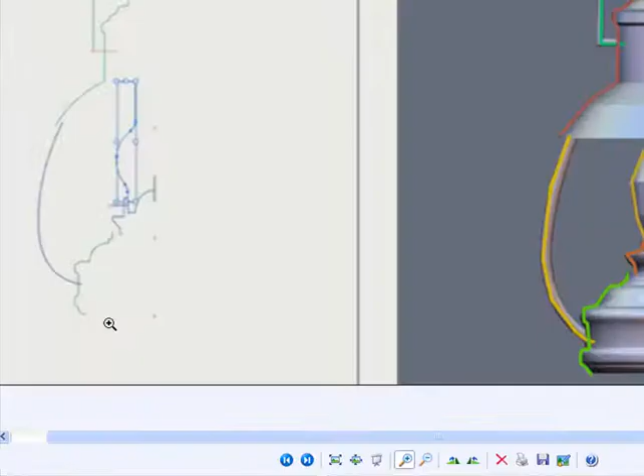The image on the right is the image that was traced and it's color coded. As you can see, I have the green line for the handle and the red line for the bell, and so on. I just traced the left side of the image only.

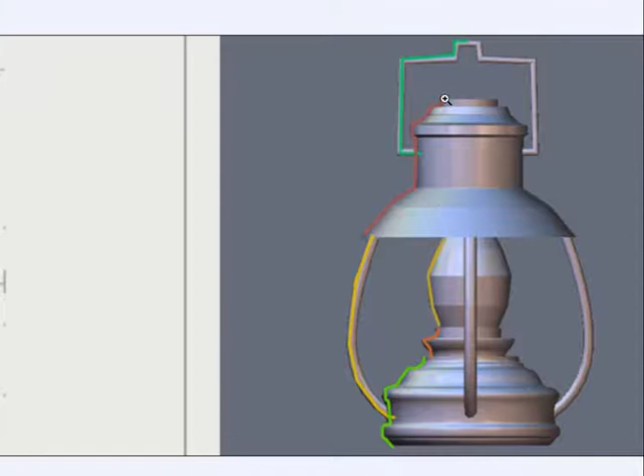Each color represents each line, and it's going to represent each part of this lantern. When the line is all drawn to the left side, it'll look something like this, or very close to it. As you can see here, this is actually the base, and this is the contour of the base. Let's go to the next section.

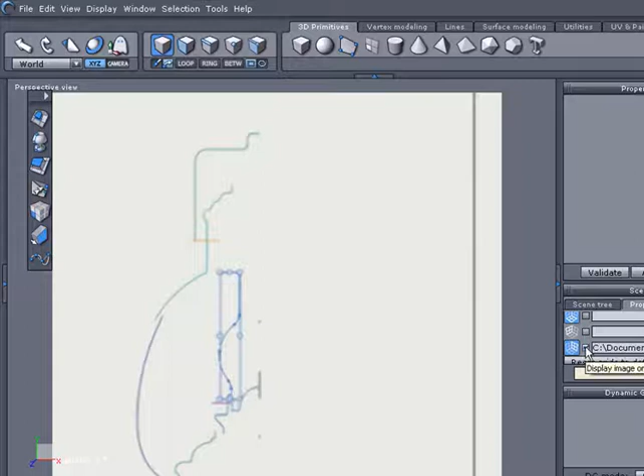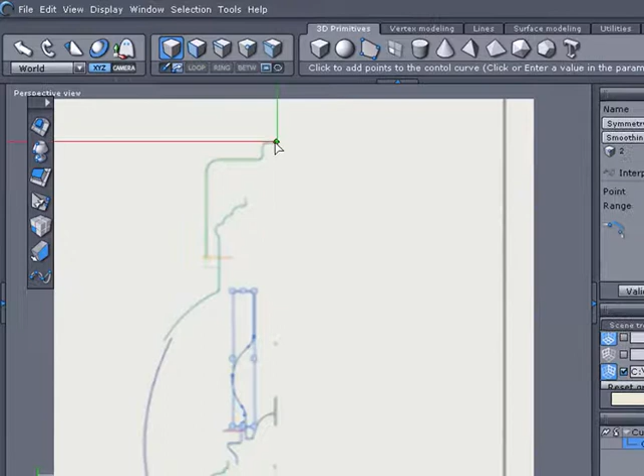Now this part here, you set your image in through the scene property, and what I need to do is import the lantern itself, the AI file, just the image of it, to give you a demonstration of certain things that could happen. If I would just go ahead and click the line tool and trace the bell itself...

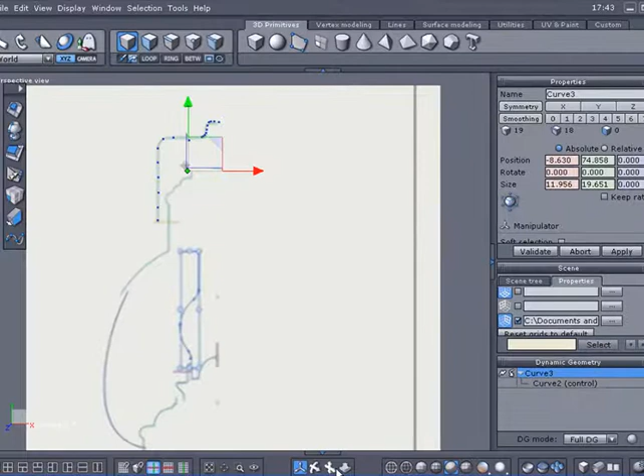Another thing is you want to have very few points here. That'll reduce the polygons, and I'll validate that. Now the problem is if you come in here and start doing this and start zooming, you can see the lines I made are not sticking with the image itself. If I pan it, they're still not sticking with it, and never rotate.

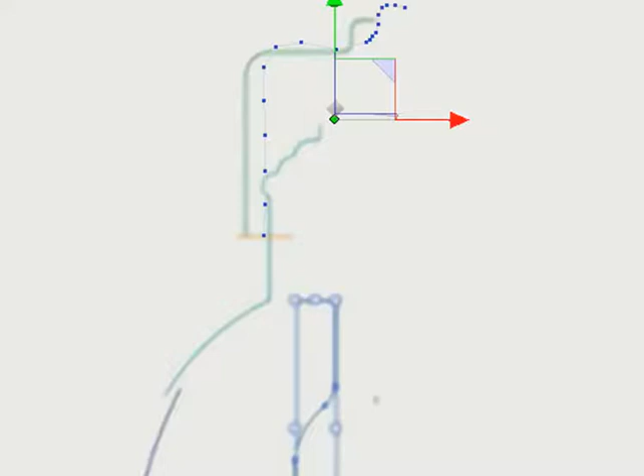So what we need to do is go ahead and press a hotkey for the front view, just to make sure I'm in the front view. We'll start all over, and I'll delete this one here. What we need to do is go down here to view all. It's going to get out of whack here, and then we can zoom this until we can see it pretty good and pan it. Never rotate it.

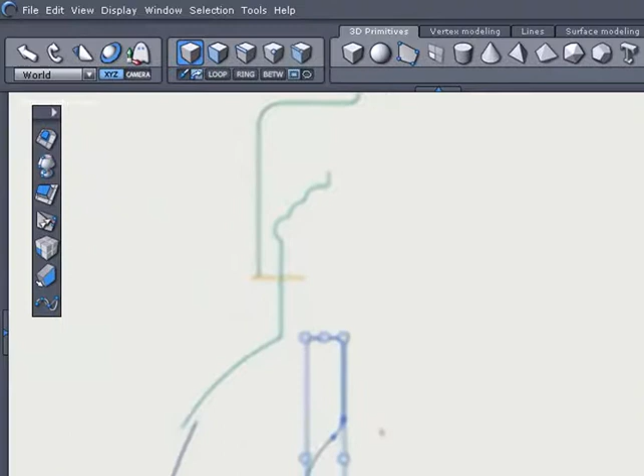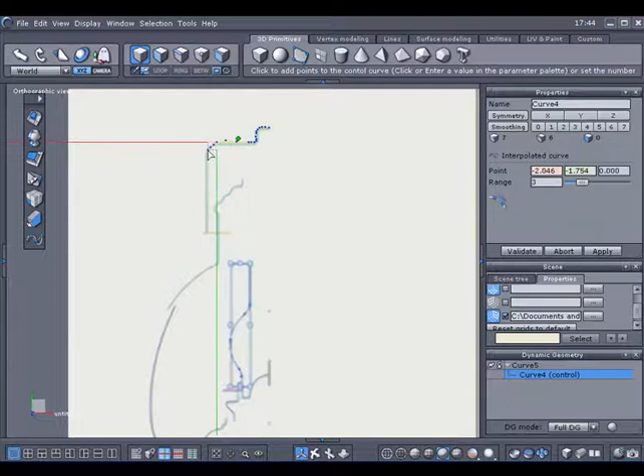A good background image would be like 1024 by 1024 to import here. Now by me doing that, if I click here and start it all over, when I zoom in and out, the ratio of the line will stay with the image. If I pan it, it'll always stick with it.

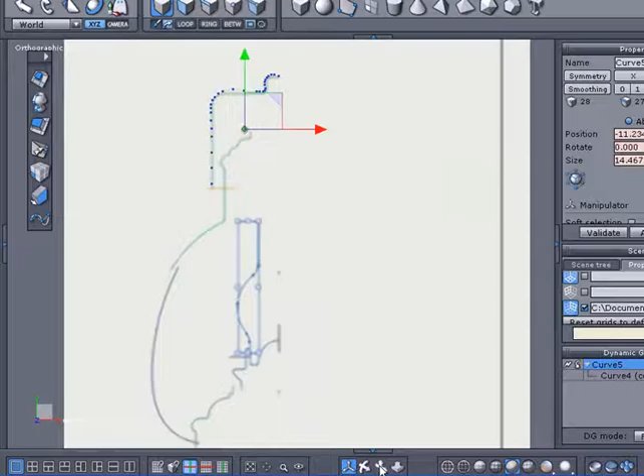Alright, we'll go to the next section. We're going to assume that I already traced this, which I already did to speed things up. I traced it on a different image, but anyway, the outlines over here on the left will actually look like this image over here.

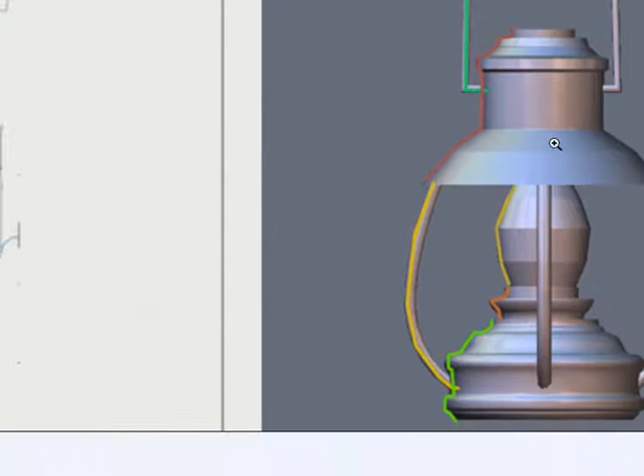We've got to find where the center of this image is at, and we can place markers there. It's actually these little dots here that are markers to show halfway where the lantern's at, or the middle of it. So let's load this up. As you can see here, these little circles are going to be my markers.

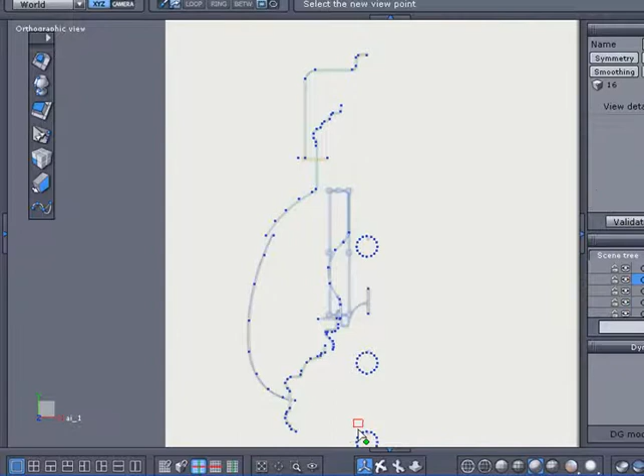Let's select one down here and zoom into this. Now this over here, this top of the circle here, will match up with this, the bottom base here. Control Z that.

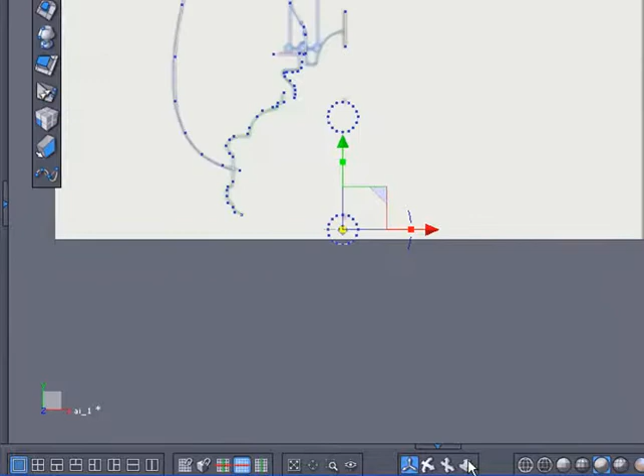All I did was take the same one and edit, copy, then edit, paste. Then I moved it up to the next one. So this circle here, let me turn some of this off so you can see better. This circle here will go with this line here. Sounds a little confusing, so...

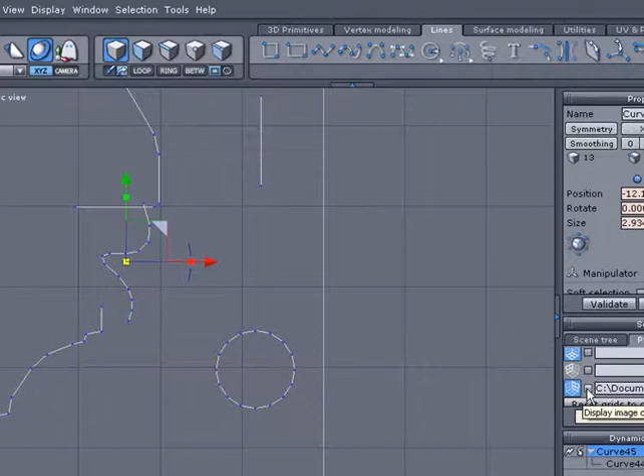I'll just go ahead and do it for you right now. We're going to rotate a little bit. Now we're going to select the line tool. Before I do, I'm just going to zoom this up a little bit better towards the base, and select the line, or the circle here.

I'm going to click somewhere on the top here, but hold the shift key down. When I do, it's going to snap to it. When I drag out, I'm going to move my cursor over to the left where the base is at. Over here, see when I'm waving? I'm going to hold the shift key and it's going to snap to that.

Now if I turn it a little bit, it should just snap. There it goes. And as you can see, the circle, by turning this, snaps itself. But anyway, if it doesn't, you can go ahead and rotate it till it does snap.

Alright, now what I'm going to do is I'm going to go ahead and select the extrude. And what do I want to extrude? Well, I've already got the shape selected, so I want to extrude the outline.

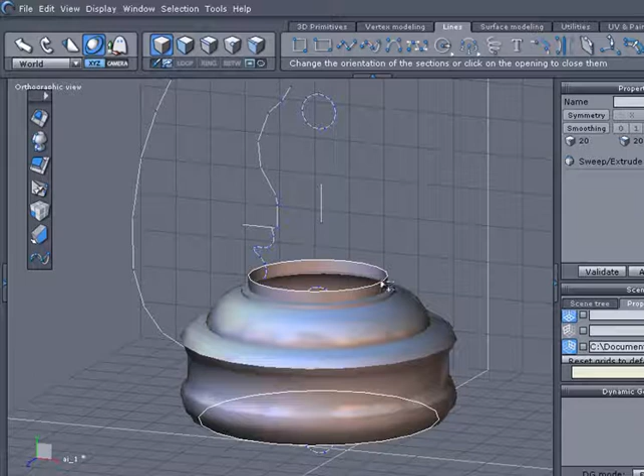Let's try that again. There it goes. And as you can see, I got the plus and minus on my cursor up here. If I wanted to collapse and close this hole here, I can do that. I'm not going to do the bottom for now, but let's go ahead and hide this for now, and we'll work our way up.

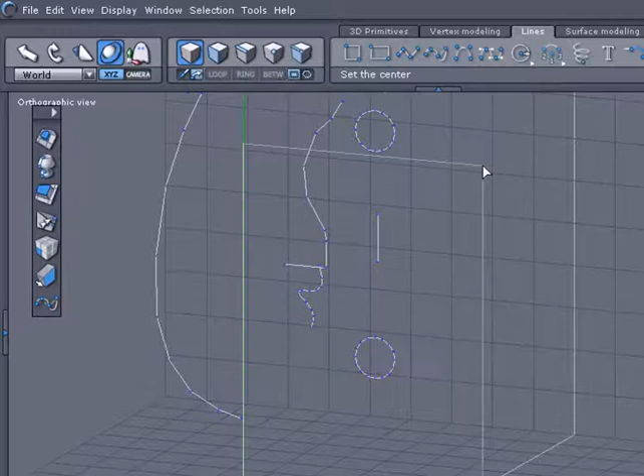So our next one will be this one here. Hold the shift key, snap it, drag out, snap it. Like I said, if you turn it and it doesn't snap to it, just turn it like this. Now if you look, these lines actually don't have to touch. It can be pretty close. And I want to extrude the next one.

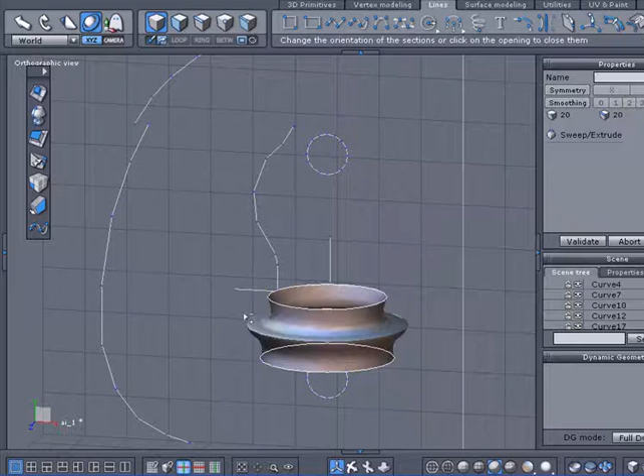We'll just leave that one alone like that. I'm going to hide that one. And we'll go up to the next one. Hold the shift key.

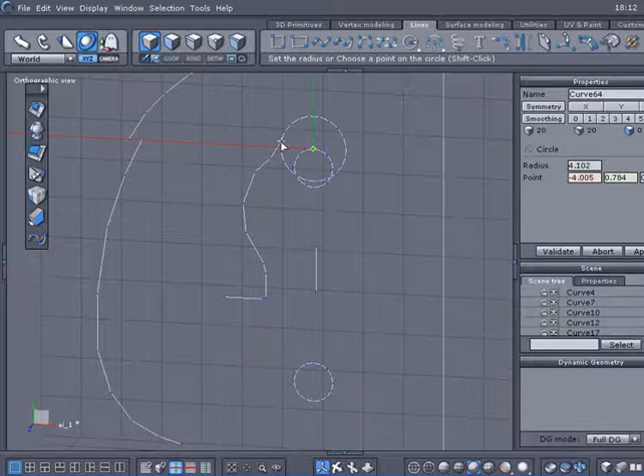And we got a slight problem here. Let's see what it is. What happened is it looked like the circle got tilted a little bit. So what I'll do is just go ahead and go into front view mode. We'll just go ahead and delete this.

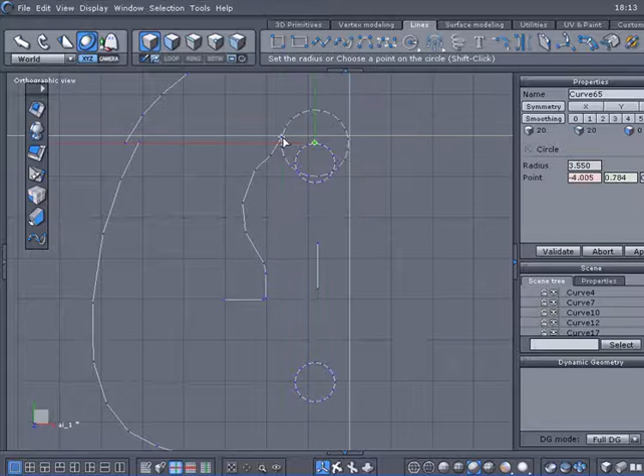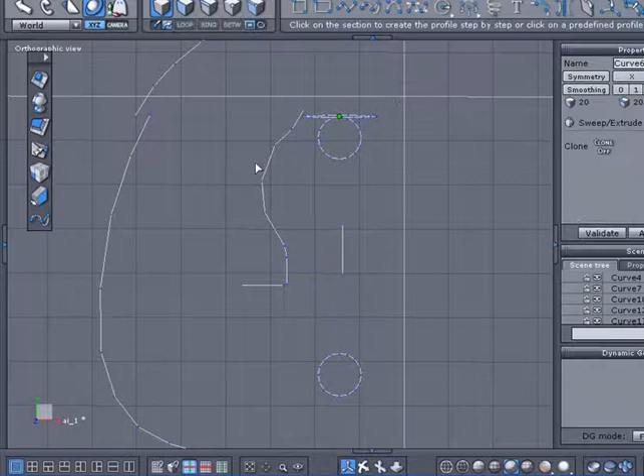I'm going to show you some do's and don'ts because that could happen to you. And we'll do this in a front view. Hold the shift key down. It's still got the tilt to it, so what you need to do is we'll just validate that. Hold the shift key. And we'll go ahead and select this. There we go. And we'll hide this one here.

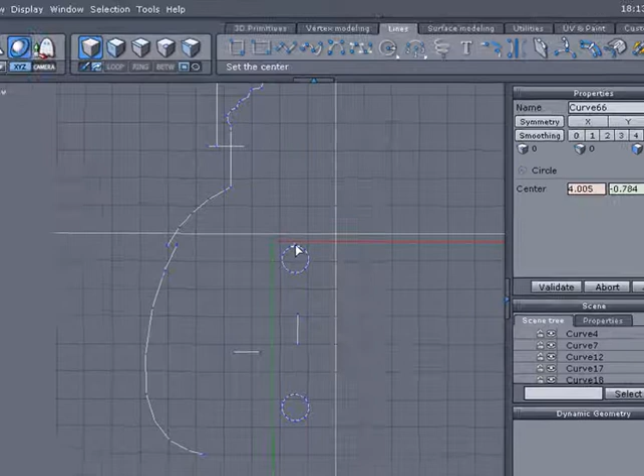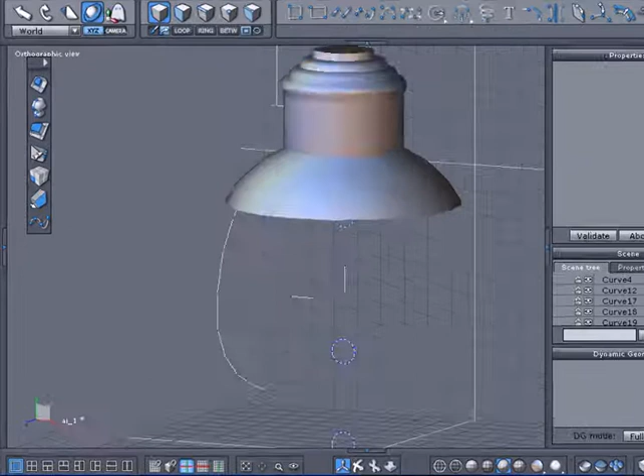And we'll go to the top here for the bell. We'll close the top up here. We'll select here, let's see which one I got. Okay, I got the line line here. Add some thickness to it.

Validate that. Same way with this one down here. Stretch it out a little bit. And this is the wick. And this is the turn handle for the wick. We'll do them together with the thickness.

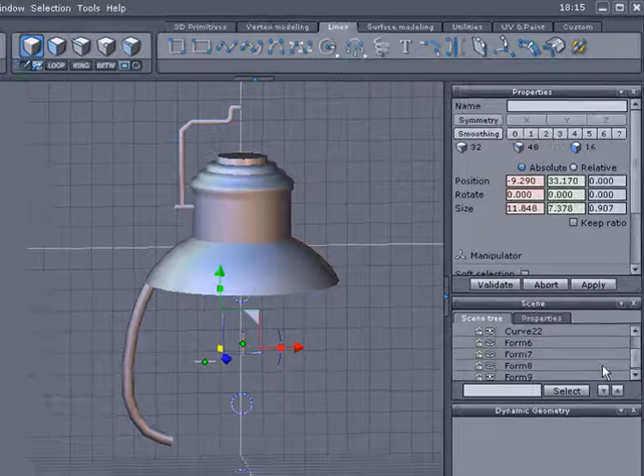Turn all these back on. We'll do everything the same but the base here. We're going to select the top up here and add a little thickness to that.

Let's undo that a little bit. Alright, now we're going to select the bar over here. And we're going to select the multi-copies. When I select that, you see it made another copy.

So I want to change the center of it, which is going to be the center of this down here. I'll zoom this up. And I'll click here, this is the center point. So we don't want to have any offset. Set that to 0. And there's actually another copy underneath there, and we want to rotate it around it since it's a circle at 90 degrees.